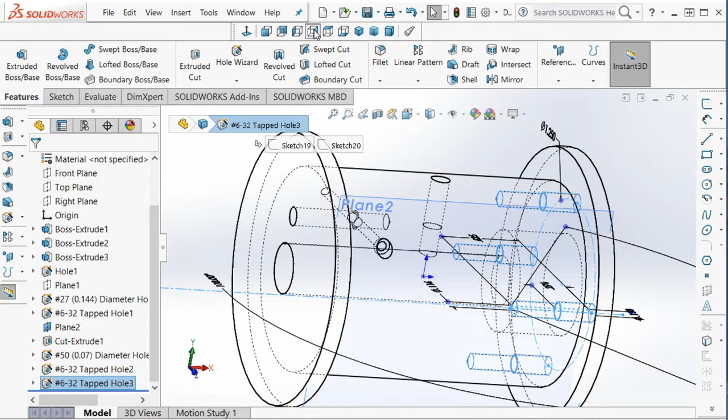In this final video of a detailed look at each of the features for the drum, we're going to look at the tapped hole that allows us to secure the wire in place and the tapped holes on the right side that will allow us to secure the drum to a driving gear. So we don't have the gear yet, but I have given you information about the bolt hole circle, and that will be enough to get us through.

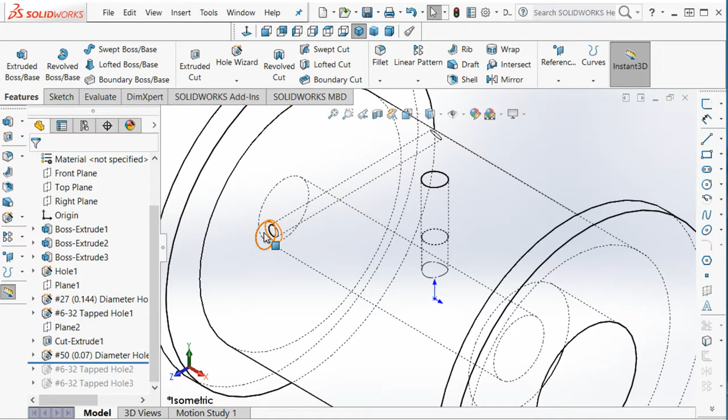So let me turn off the previous planes here and roll back my features. So what you have from the last video is everything except those last two tapped holes. We have a hole for the pulley wire, for the wire to go through the part. This hole is for the set screw to secure the pulley to the shaft. And this hole is where the shaft will come through the part, but it also has a large counterbore necessary for motor testing. So my next step, I'll turn my shading back on.

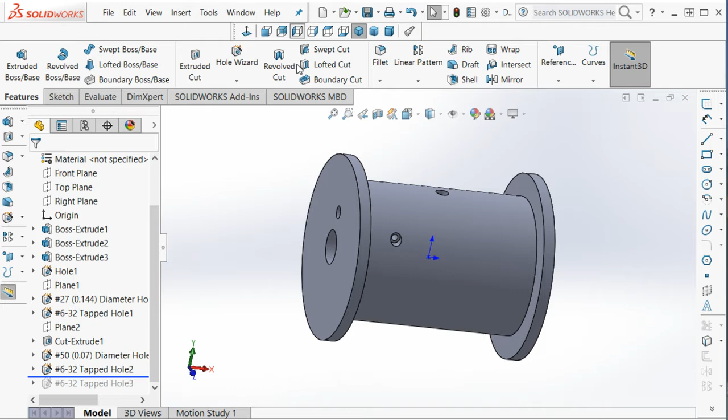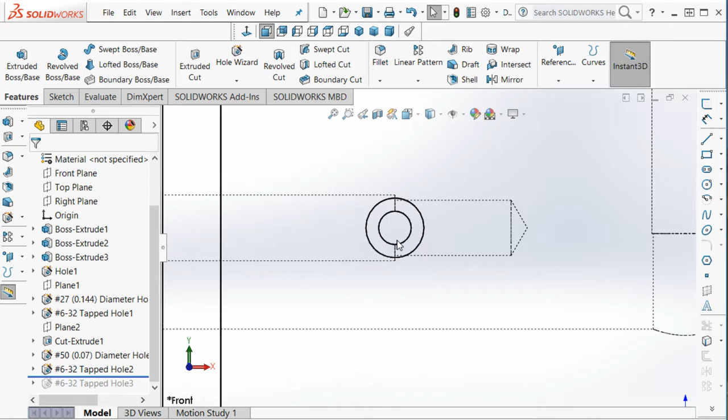My next step is a hole on the left side that intersects, actually I should have kept my wireframe. It intersects with the hole for the wire. And you can see it's very important that this is the threaded part of that hole, and this is the extended, just machined part of the hole. The hole itself intersects fully, and the threads go halfway into the wire hole. So that's going to pinch the wire into this hole and hold it in place.

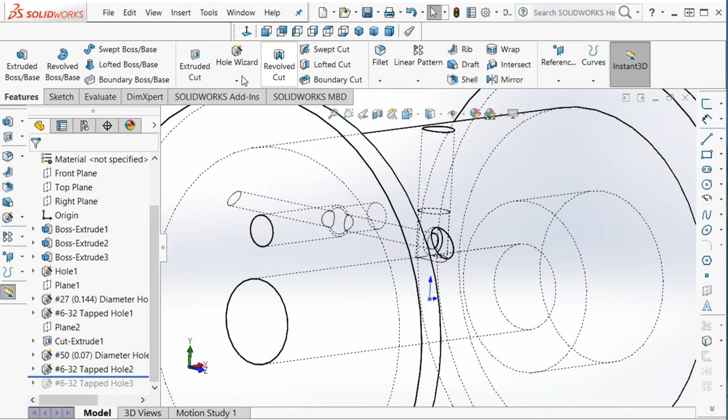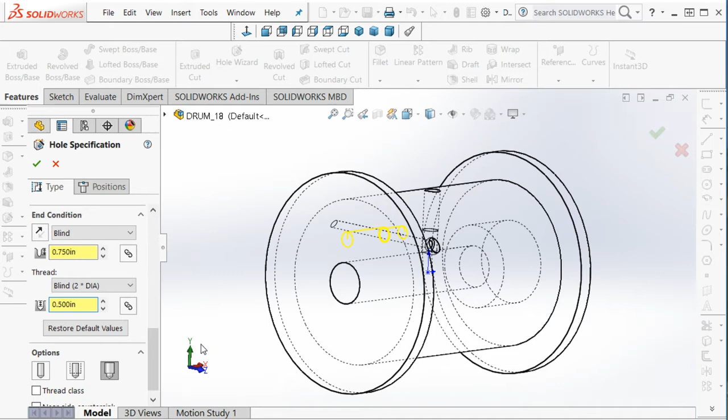And I suppose I could have taken out a 1/10 or 2/10 of an inch with a clearance hole, but we're just going to thread the top half inch of this. You get a full mechanical threading if you have a depth of twice the diameter for the threads. So this is more than we need, but that won't hurt anything. It just takes a little bit longer to thread.

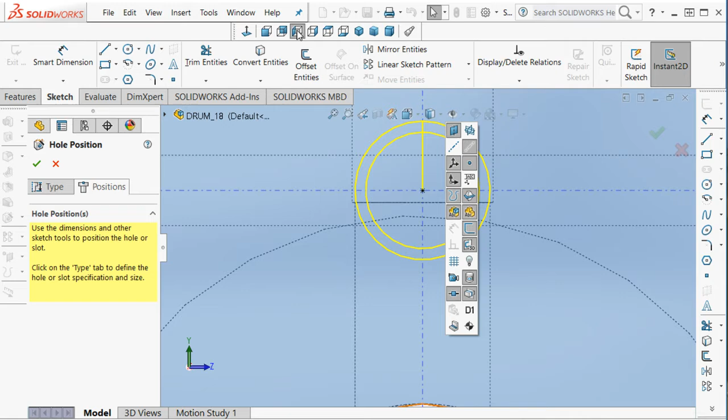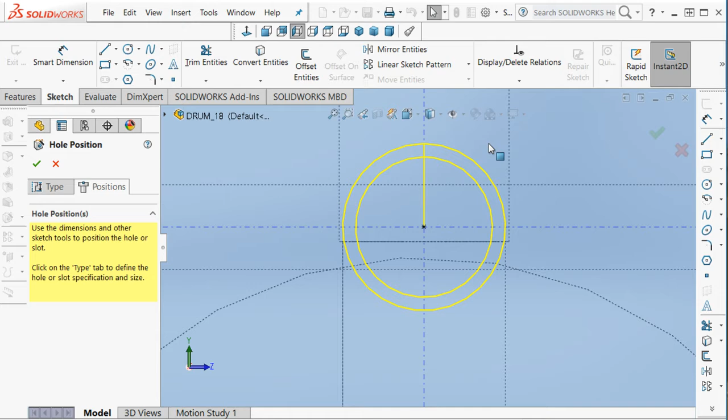And then positions for this hole, let me come normal to my sketch. How did I get that lined up? Let me show you. I came to the visibility and I turned on my temporary axes. Can you see how many axes just showed up in my part? I can see the axes through every hole now. So I can put that point directly on this axis through the wire's hole so that they are properly aligned. And I don't need to add a dimension. If I change the first hole, this will update as well. So that's a pretty convenient way to do that. Okay, so that's my 6-32 tapped hole on the left face.

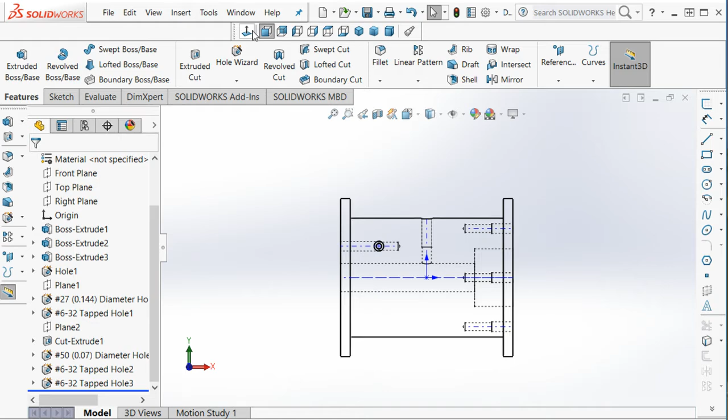The next step was to come around to the right face, pre-select the face, and start a hole wizard. And let's take a look at that feature. So I come to a right view, and I'm actually going to turn off those temporary axes. They get to be a little bit cluttering. So let me show you the feature. These are, again, tapped holes for 6-32 with custom sizing as appropriate. And then in this one,

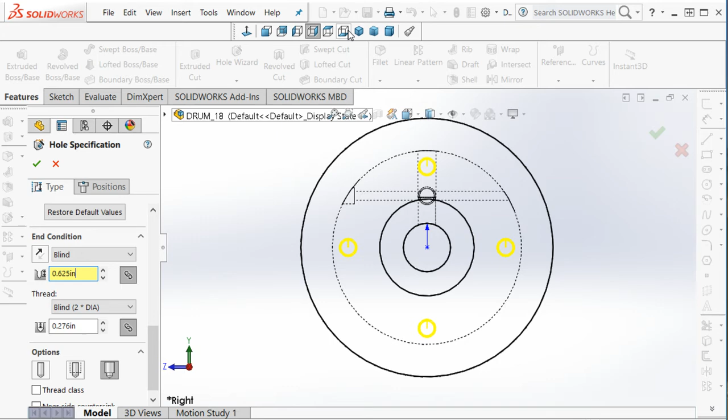so historically we've made this hole a little bit extra, 0.625, to give plenty of room at the bottom of the hole. The thread, however, is a pretty standard thread, so you don't have to thread any more than is typical. This might allow you to thread a little bit more than you absolutely need without damaging the tap. So it's just a slightly custom blind end condition. And if I could show you in 3-space, that's going into the part, and from this axis, I can see that there's material left. I'm not threatening the integrity of this part.

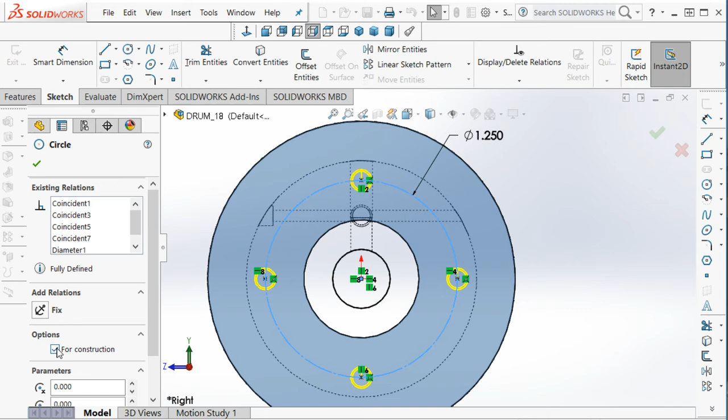And from the right face, I'll look at the positions. What I did to make this sketch was I put in a circle using my circle tool, and I selected that circle and made sure it was for construction. And then I grabbed my point tool and I put one at each of these four quadrant markers on the circle. Finally, I gave the circle a diameter of 1.25 inches, and that finishes this feature.

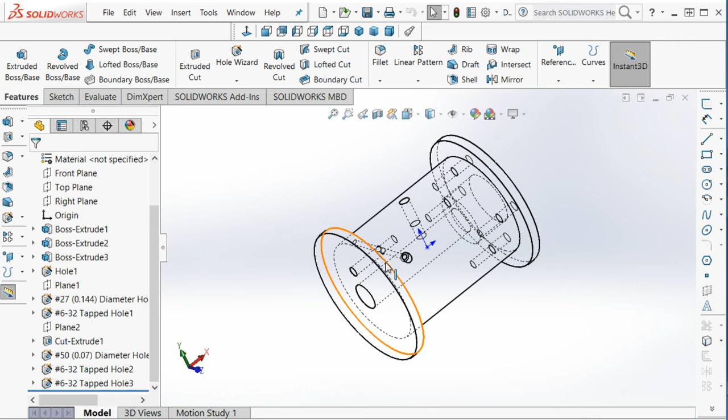So in 3-space, I have 4 tapped holes on this side, allowing me to secure to a driving gear. I have a tapped hole on the left, allowing me to secure the wire. That's how we'll test this part, by the way. We'll put a cable in, we'll secure it with hardware, and then we'll pull on that cable and see if it comes out. I have a hole for the set screw to the shaft, and I have a counterbore over here for the torque testing that we haven't talked about quite yet. So that is a detailed look at the drum that hopefully gets you finished with this part.